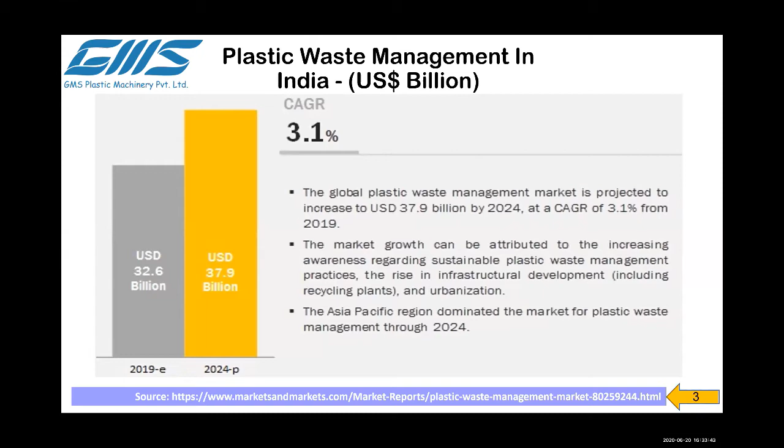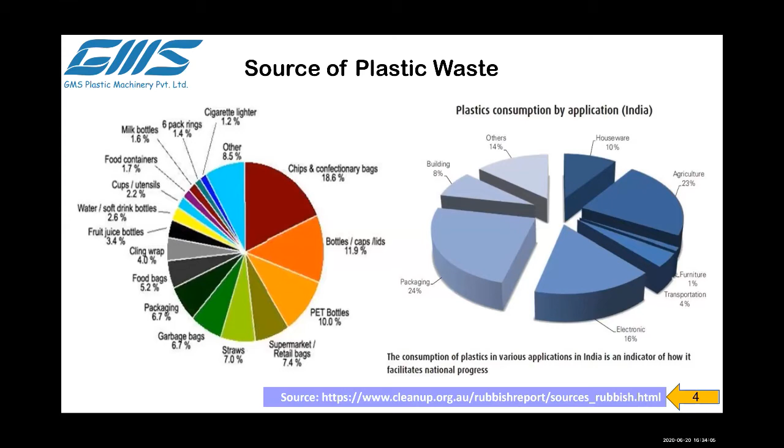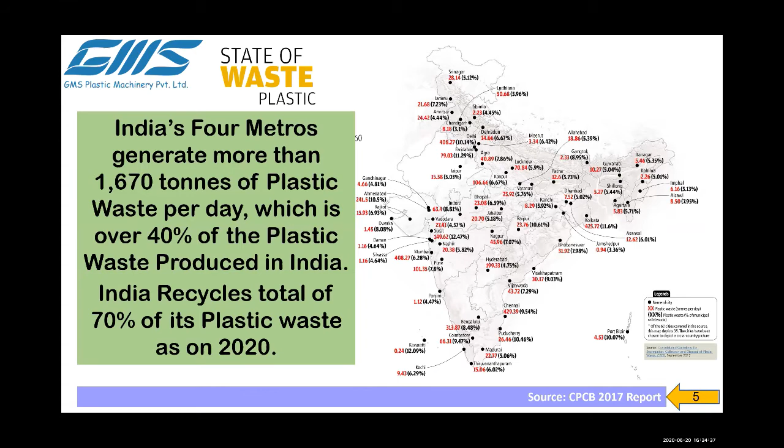You can also see the amount of waste generated all over India, of which India's 4 metros generate more than around 1,670 tons of plastic waste per day, which is approximately 40% of the total plastic waste produced in India. And India recycles around 70% of its plastic waste as of 2020.

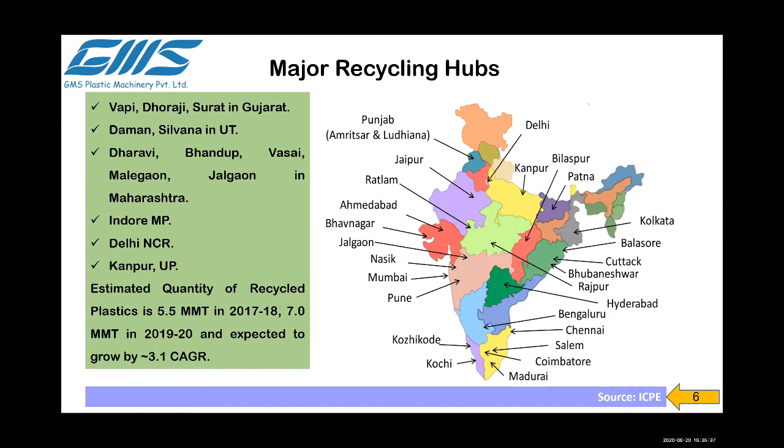The estimated quantity of recycled plastic is around 5.5 million metric tons in 2017-18, 7 million metric tons in 2019-20, and expected to grow at around 3.1% CAGR. When it comes to washing plants, we will be talking in more detail about them in our next webinar.

But today, let me at least highlight the basics of the washing plants required for waste management in the plastics industry. The most important factor is that you need to grind or shred the material before it goes into friction washing, then into the flotation tank, which Dr. Kale was talking about, for separation of heavy particles and the light plastic waste.

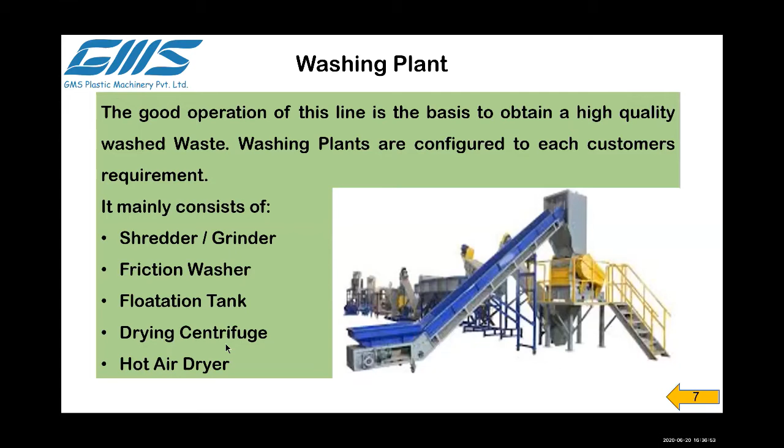Then we have the drying centrifuge where we dry the material. This is a similar system to the washing unit, but it has an external filter to remove all the water. Then we have the hot air dryer blower, which dries the material to around 98%. So this material can be directly fed to our recycling plants.

Then, of course, we have the semi-automatic washing plants, where if you fit a few more conveyors, you can make it nearly fully automatic. The water consumption can be conserved using ETP units in both the cases.

Continuous operator involvement in semi-automatic is quite high and quite regular, because they are required to input all the different chemicals and detergents, etc., during the different operations, then to remove the water, so all these processes are manual and they need to be taken care of in the semi-automatic washing plants.

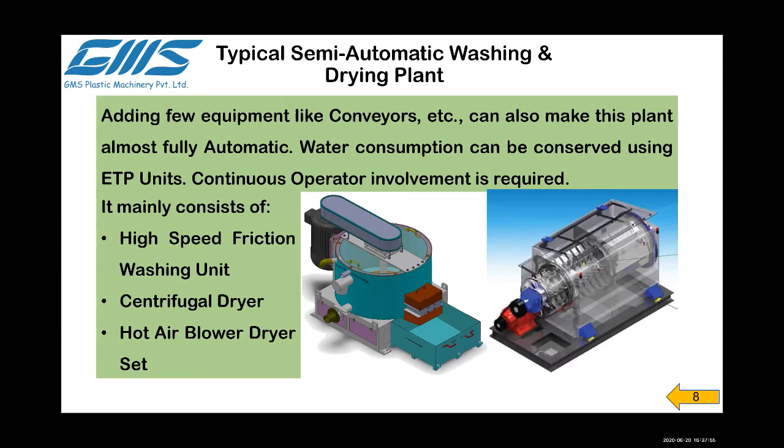The major parts for the semi-automatic washing plants are the high-speed washing unit and the centrifugal dryer, of course, which is connected to the hot air blower, which can give you 98% dry material.

Then we have the recycling machines. We have 3 different technologies. Of course, the major 2 different technologies of recycling. The first one being with the force feeder, where you can see the tall tank here. My mouse is showing you. The tall tank is the force feeding device, and below it is the feeding screw, which is feeding the material to the extrusion. And the extruders are vented, of course.

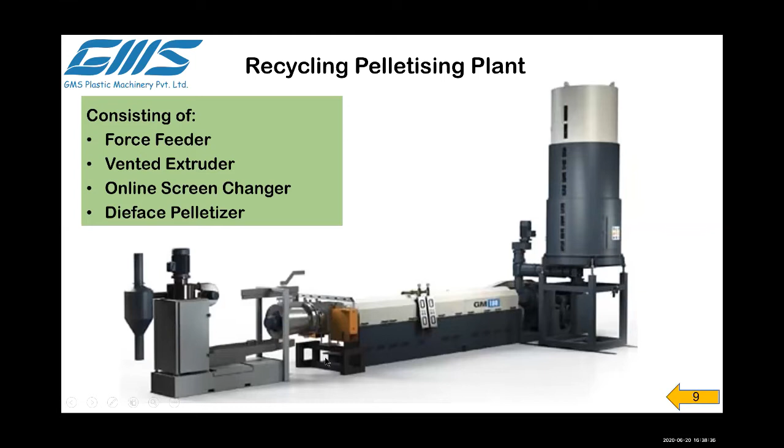Then we have the online screen changer. You don't need to stop the machine. And we have the die face cutter. Similarly, we also have the densifier, where you densify the material instead of force feeding. In the force feeder, you need a pre-grinder, or if the material is coming from the washing plant, a densifier is not required. You can run the same with the force feeding device. All other parts of the equipment are identical, so I don't need to elaborate on that.

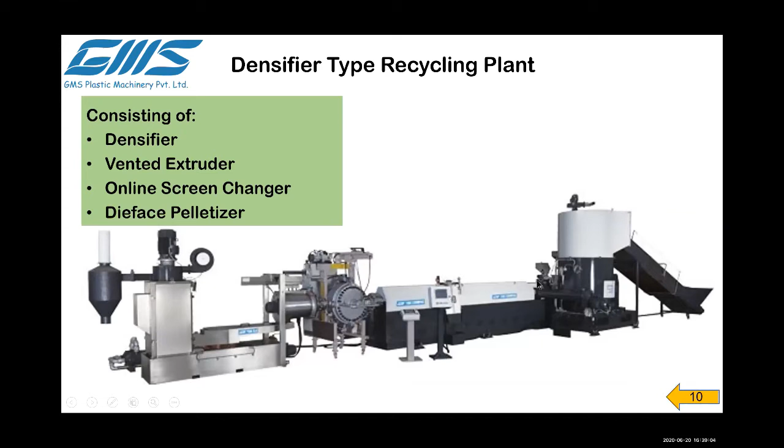Then we have the mother baby. This, of course, is similar to the first 2 technologies. In this, you can either put a force feeder or a densifier, but then there are 2 extruders in line and 2 screen changers. This is for highly contaminated or highly gassy material.

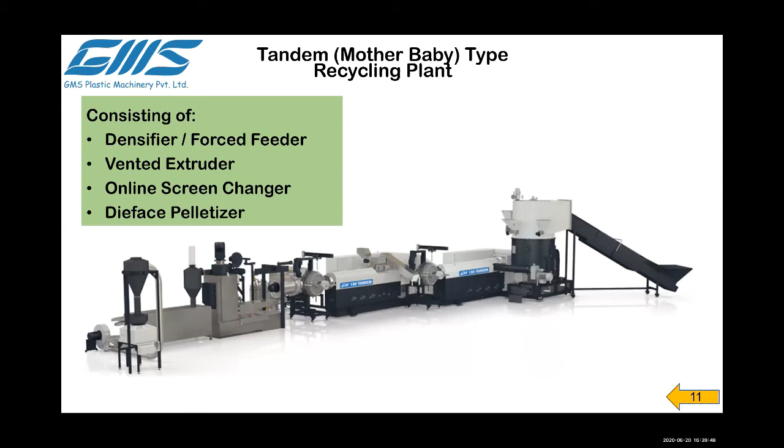I would not use this for highly contaminated in the sense, if it is highly printed, yes, it is a recommended recycling machine. But if it is not highly printed, but very, very dirty material, I would suggest to wash before we recycle. Because the screw barrel life can reduce drastically by just putting in dirty waste, which normally is the tendency in the Indian industry today.

Now I'll give you a comparison of conventional and advanced recycling technology. In the conventional technology, pre-drying is an important factor. You need to pre-dry, hence every single customer needs a high-speed mixer to dry the material, to warm it up slightly so that it feeds easily. Otherwise, there would be slippage of material. And when there is slippage of material, the power consumption increases and the screw is not able to give out the right throughput.

Then there is the direct hopper in the traditional machines instead of force feeding or the densification system, which is the new trend. So in the hopper, consistent feeding of light material is not possible unless you agglomerate and feed it through the extruder, or you have someone manually pushing the material consistently to keep the feeding constant. Then we have the offline agglomerator required, because if there is a material like film or non-woven sacks or woven sacks, you cannot do it without agglomerating it.

Then we have the extruders. The older ones are pulley driven. Most of them are hopper fed, as I said earlier. The screw diameters are big. Hence, degradation is very, very high compared to the advanced machines. Of course, I'll give the comparison later.

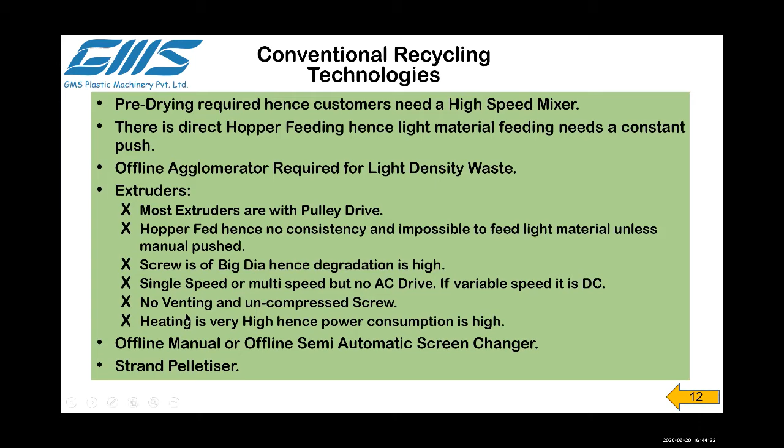Most of the older technologies had either the manual screen changer, offline ones, or the offline semi-automatic screen changers. None of them used to have fully automatic screen changers as of the current time. Then most of them had strand pelletizers. I'll give you more detail about strand pelletizers later, because I have a full slide for that. Let me give you the difference between the conventional and the advanced. Now I'll come to the advanced.

In the advanced technology, pre-drying of material is not required. In fact, if there is 3% moisture, it is also acceptable for all the recycling machines in the current day scenario, basically because of the venting which is available in the extruder. I would say 90% of the machines would either have a densifier online or a force feeder online.

And that is the need of the hour to give consistent and continuous throughput of the material and keep the granule size even. If you see the traditional equipment, the granule size keeps on varying: thin granules, long granules, short granules. Those sort of issues don't come in the advanced equipment. It is a consistent granule nature that is important and is required.

Then we have the online cutter compactor or the densifier or the agglomerator, which feeds material like raffia, raffia is the woven sacks, then we have the non-woven bags, the filaments, the fibers, certain film waste. It would be ideal to feed through a cutter compactor, unless, of course, as I said, you're going to have a pre-washing unit where you're already going to grind it.

Again, let me clarify here that, I would say not mostly, 100% of non-woven or fiber materials cannot be cut by grinders. So in those cases, we will not be able to wash those waste also, and they may need to be passed through cutter compactor or densifier or agglomerators. So that is one feature where we need to make sure what is the requirement of the client.

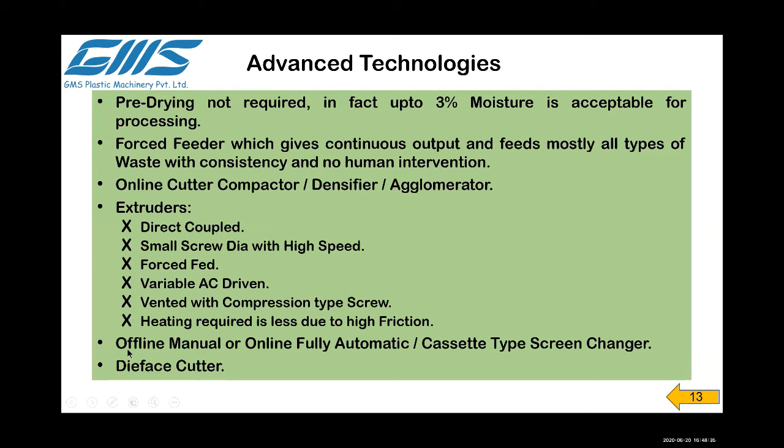All the screen changers are either manual offline or online fully automatic, cassette type or track type. So it depends on the customer's requirement, but the online feature is something which is the need of the hour to save the production. Die face cutters, of course, give you virgin-like pellets, and consistent one-size granules without sticking are the important features of the die face cutter. Now let me give you the comparison for power, labor, etc. from conventional to advanced technologies.

If you see, the power consumption in conventional equipment is close to 0.4 to 0.55 kilowatt per kilo due to various factors like pulley belt slippage, as I said earlier, or the pulley elongation slippage, single or multi-fixed speeds, which does not allow variation when required, inconsistent feeding as no force feeder is used, preheating with high-speed mixers makes it more expensive because you have to pass through a lot of power consumption during preheating.

Extruder heating is, of course, kept very high because the screw lengths are longer, the screw diameters are big. So to heat that mass of steel, you need more power. All the motors running are at above 70% capacity. So the power consumption at the motor side is almost high. Of course, due to the non-availability of AC driven machines, the power consumption is also high.

As compared to the advanced technology, the power consumption is close to 0.25 to 0.37 kilowatt per kilo. So if you see the comparison is nearly half, nearly close to 80%, 90%, I would say, not half. Sorry, 60, 70% of the conventional machines. So the reason for it is, since there is direct coupling, there is no slippage, there is variable speed availability, so you are able to maintain the torque. There is the consistent output because of the force feeding.

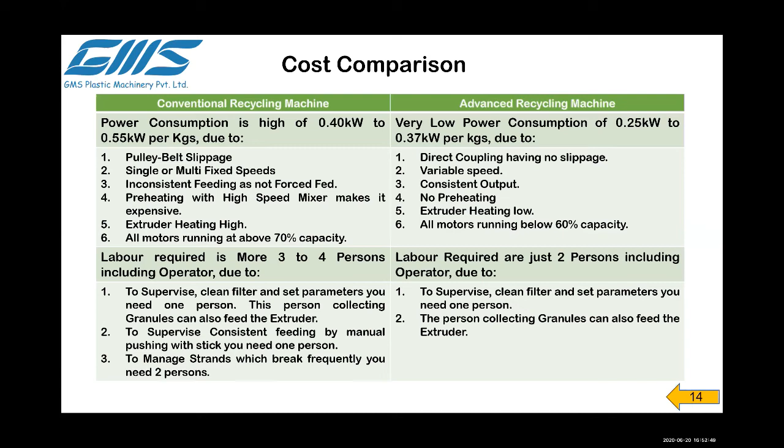Let's see the comparison of a strand pelletizer to the die face cutter. When strands break, I've been saying it again and again, you need to refix them. So you need 2 people to operate the cutters. Then you are generating, I know for a 100 kilo per hour machine, approximately per day wastage of around 100 kilos. So that 100 kilos per day wastage, as against the die face cutter, can just compensate the cost of the die face cutter within a span of 1 year. So that is the investment repayment capability in a die face cutter as compared to a strand pelletizer.

Random uncut granules are seen in the strand pelletizing systems, whereas in the die face cutter there is no uneven granule size. Every time the screen fills and the machine stops, there is a lump generated at the stop point and at the startup point. Whereas in the die face cutter, you don't need to stop the machine. You just need to change the filter and you are back in production. It's just a few seconds and the granules restart.

So you don't need to even set the die face cutter again and again. Once you set it, it's done. You stop and restart the machine. You stop the machine only when you are changing the shift or you are maybe shutting down for a weekend or something like that. Offline screen changes, the machines need to stop to change the screen, whereas in Oleodynamic or the online screen changes, you don't need to stop the machine.

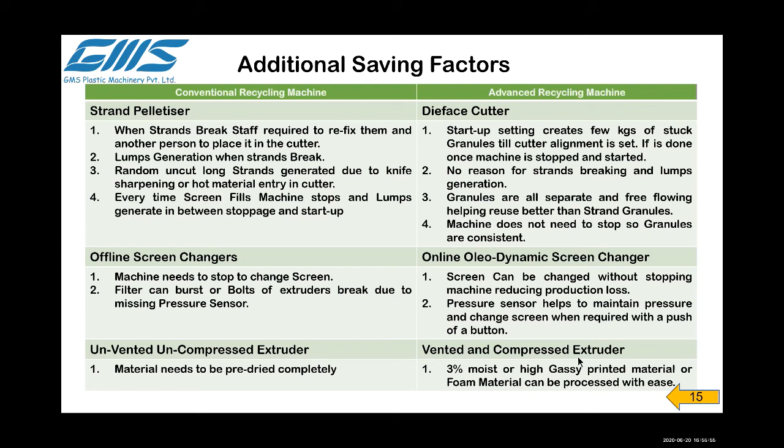Let us ascertain the performance of GMS. Well, GMS provides a free trial at our plant in Bhiwandi. Anyone who is interested can send around 200-300 kilos of their waste, and we will run the trial in your presence if you are available to come there, or in case, because of the coronavirus nowadays people want to avoid, we can show it to you online or live with the help of WhatsApp or Zoom or whichever mode you prefer. We can show it live to you.

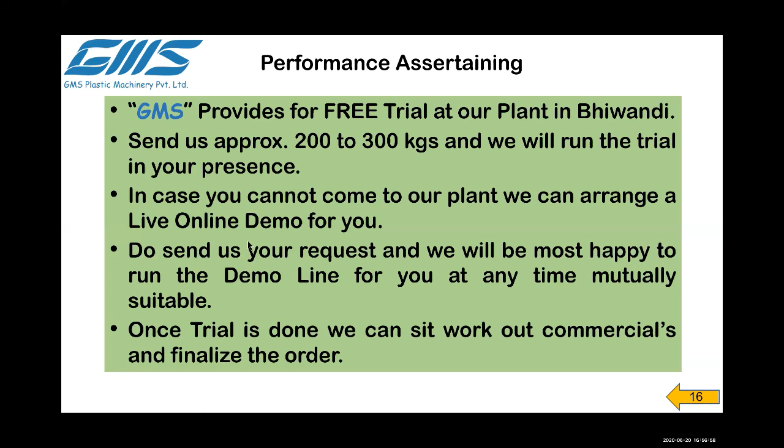Why GMS? GMS basically provides a free trial to every customer. That is, of course, the most important thing. 95% of our customers have seen their trials, and if you come to our plant, we can show you hundreds of samples which have been tested for each and every client that has come to see a trial. GMS designs each and every equipment to suit the customer. So when we do the trial, our technical team is always making notes of the requirements for that client's material, so that we are able to give you 100% performance of your waste to be recycled.

GMS also provides installation at no engineer cost. GMS provides lifetime service, free service. Beware, it's free service. All you need to provide is travel and accommodation to our staff.

GMS supplies machines with only high quality branded components. To name some, we give you drives from Danfoss or ABB, the motors are Bharat Bijli or Hindustan or Siemens or even ABB, depending on the supply dates. But contactors are Siemens, or L&T if customers demand L&T, because normally people prefer Siemens. Switches and all are Teknic. So most of the components are easily available in the market.